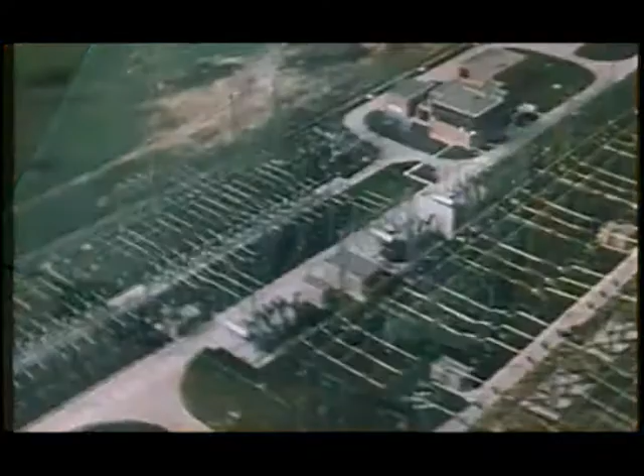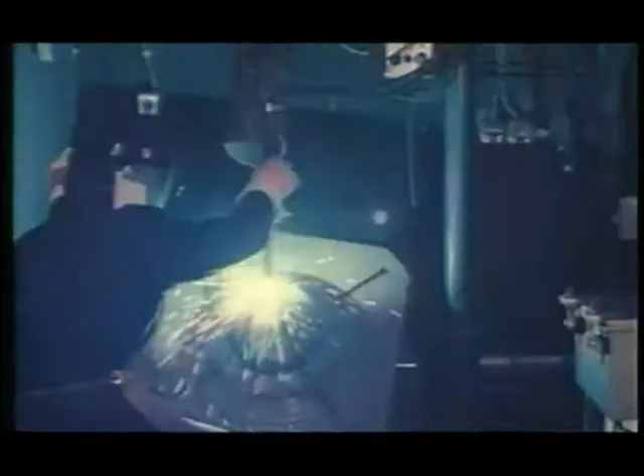Led by the pioneer spirit, Energoinvest grew quickly in all dimensions and qualities. Based on its own projects, factories were built one by one, used for production of reinforcement structures, power pylons, and tons of grey cast.

As early as 1959, Energoinvest crossed the borders of the country and entered the international market. The expansion continued through reliance on own factories for production of electrical equipment for low, medium and high voltage.

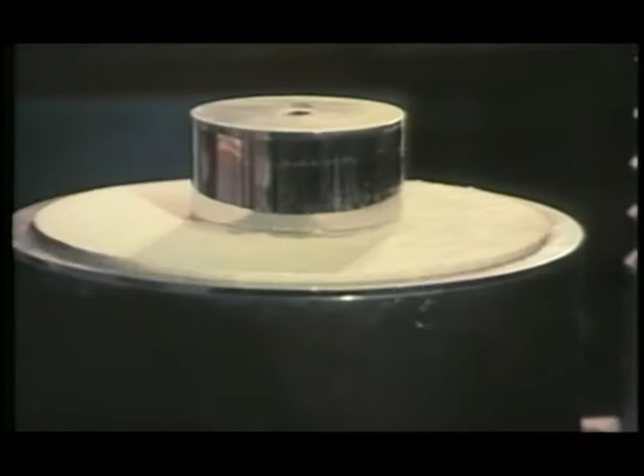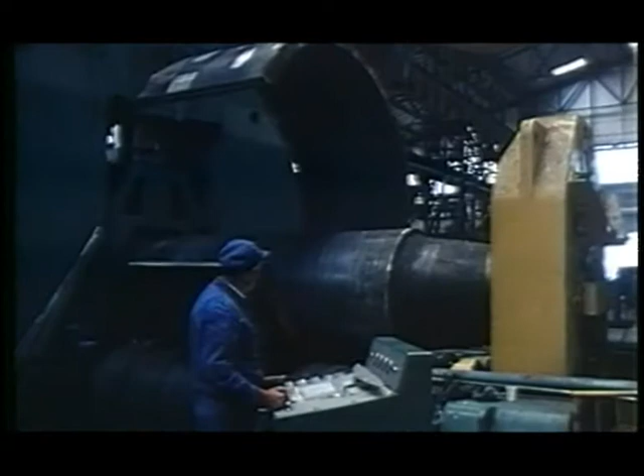In parallel, factories were built for production of processing equipment, heating equipment, heat converters, containers for non-standard pressures and temperatures of water and steam, and specialized reinforcements. At the same time, capacities were built for production of equipment for transfer of electric power.

It was in this specific domain, design, production and construction of the largest pylons with transformers, that Energoinvest earned a respectable international reputation.

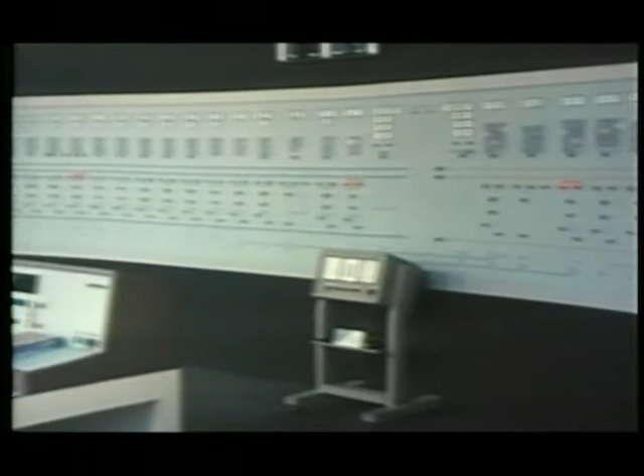Energoinvest reached a high international rating also in the sphere of design and production of systems for automated management of production processes in hydroelectric and thermal power plants, oil pipelines, facilities in air and sea traffic.

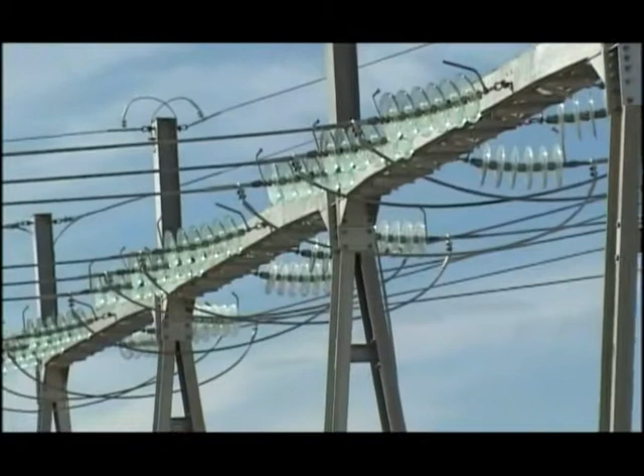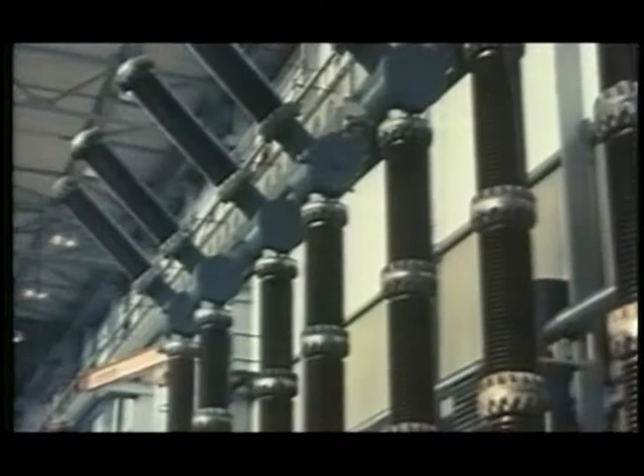Energoinvest designed and built more than 60,000 pylons of different voltage levels worldwide, and around 7,000 transformers, of which 500 fall into the category of the largest power facilities.

Energoinvest constructors built more than 50 hydroelectric power plants in the country and worldwide. For example, Jajce 1 and 2, Jablanica, Salakovac, Trebišnjica, Rama, Visegrad, Bočac.

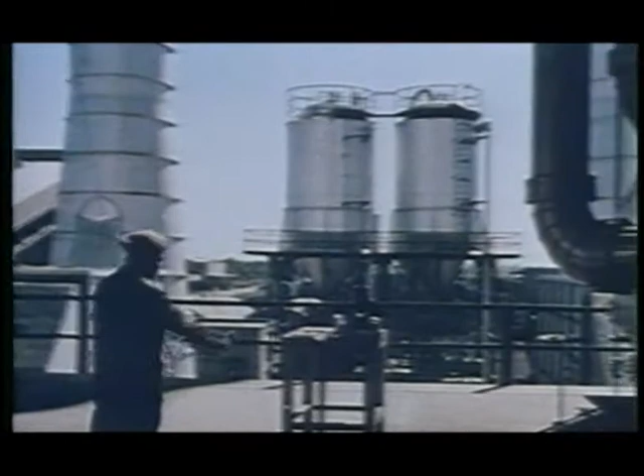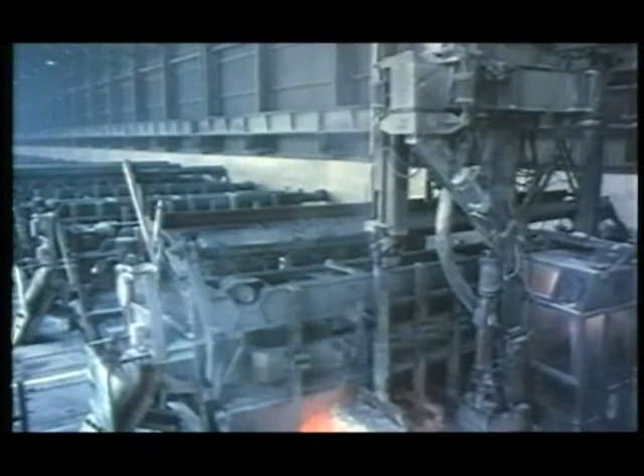Energoinvest also built production capacities of high industrial complexity, such as aluminium in Mostar, aluminum oxide factory Birac in Zvornik, aluminum processing factory in Šipovo, Vlasenica, Bihać and Široki Brijeg.

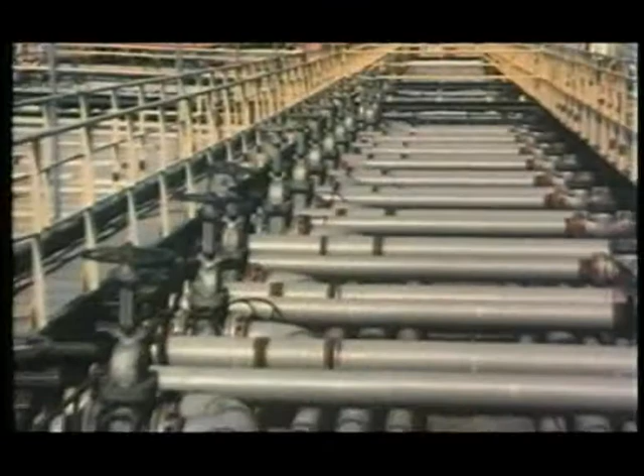Energoinvest put its signatures also on refineries in Bosanski Brod and Modrica, Hempro in Gradačac, methanol acetic complex in Kikinda, expanded refinery in Tobruk, facilities in the Skikda refinery in Algeria, numerous liquid fuel terminals, spherical tanks in the chemical industry, and other products in the highest class of Lloyd.

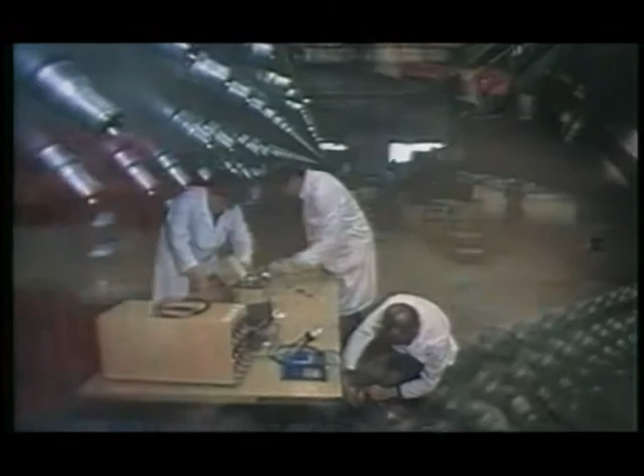By designing and producing steam separators for nuclear power plants in the late 70s of the last century, Energoinvest became a member of the world's elite industrial class.

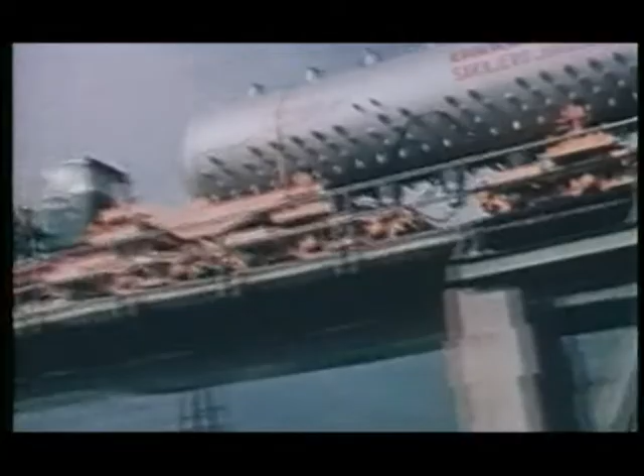Countries in other continents would lag behind achievements of the modern world. Over the past 55 years, Energoinvest was active in global development fronts.

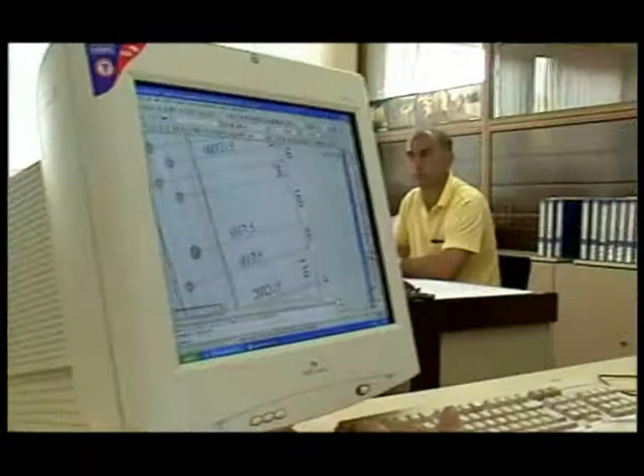Highly qualified experts with multidisciplinary knowledge were declared by Energoinvest from day one as the main resource, the supporting column, and at the same time as one of the goals of its development.

Such orientation of Energoinvest was the industrial renaissance of the whole Bosnia-Herzegovina and the flywheel of development of university education.

Previously won and new competency recognitions were expressed through Lloyd's Register, seals of the American Petroleum Institute, ASME Code, Stamp U and U2, Charter for the Best Achievement in Construction, membership in CIGRE, recognition of the World Economic Forum as one of the most successful companies in Central and Eastern Europe, ISO certificates of the Lloyd's Register, ISO 9001-2000, ISO 14001-2004, and OHSAS 18001-1999.

Among others, Dutch and American companies bought licenses from Energoinvest. Energoinvest gave society the most respected university professors, ambassadors, mayors, ministers, prime ministers.

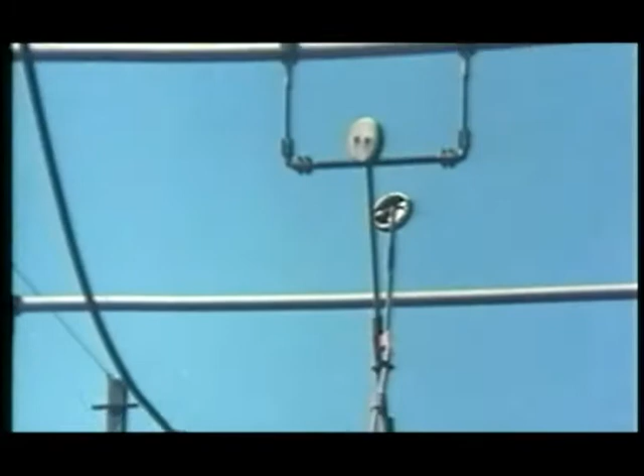Today, Energoinvest is a company with strongly expressed functions of engineering systems, offering synergies using the turnkey formula and servicing highly demanding local and international partners in construction, reconstruction, modernization and revitalization of complex buildings and facilities in its field of activity.

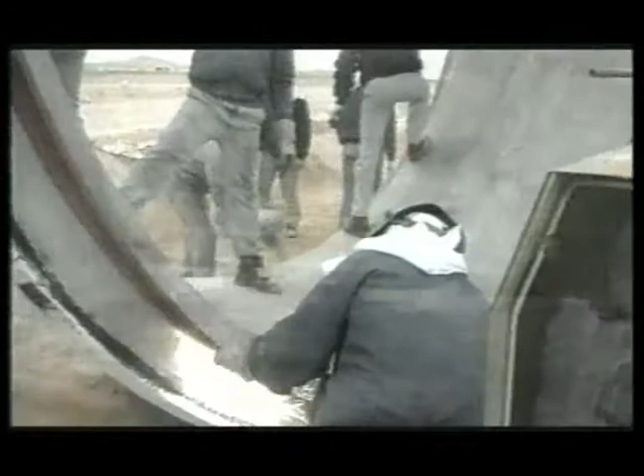Energoinvest is currently working on implementation of the Great Man-Made River project in Libya, the most grandiose engineering undertaking today, thanks to which, from the heart of the Sahara, free-flowing potable water will be brought to traditionally thirsty areas of Libya, including the cities on the Mediterranean coast.

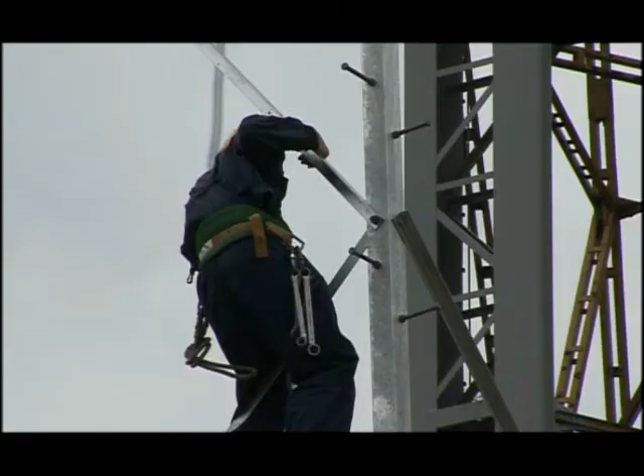In the fields of increasingly competitive, innovating and profitable business in a globalized world.

Energoinvest, 58 years of tradition and confidence.

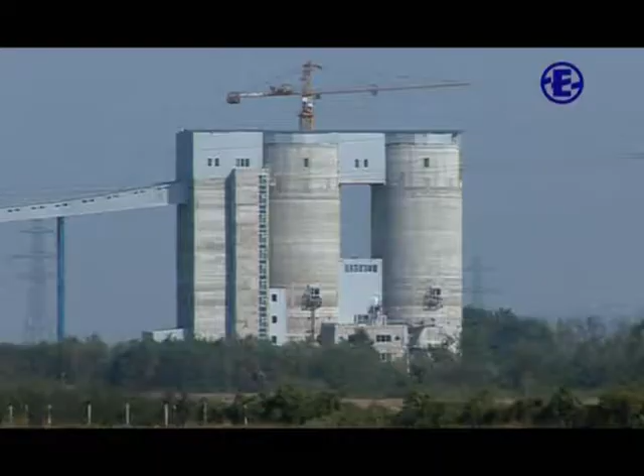Energoinvest is a leading company in Bosnia and Herzegovina in the domain of designing and implementation of complex projects in both national and foreign markets.

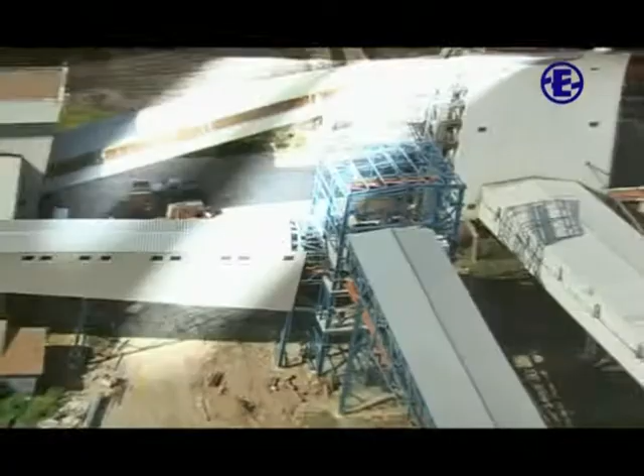With its wide scope of activities, Energoinvest is known worldwide as a multidisciplinary engineering company which employs 900 employees. Energoinvest's capability for successful implementation of projects on a turnkey principle provides impressive international reputation.

In March 2007, Energoinvest concluded a contract with Elektroprivreda of Serbia for realization of the project, an ash disposal system of thermal power plant Nikola Tesla B, which represents the first ecological project of this kind in Southeast Europe.

The project, at its first phase valued at 28 million euros, was financed by the European Union, the European Agency for Reconstruction.

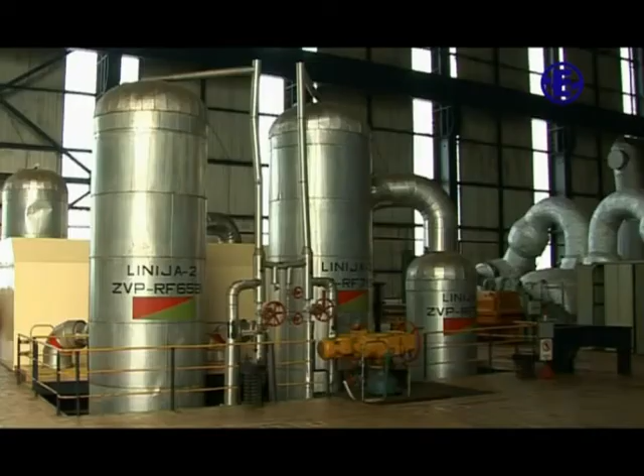Thermal power plant Nikola Tesla B is a power plant with two units, 620 megawatts each, situated in Obrenovac in the vicinity of Belgrade. This thermal power plant represents the strongest support to the electric power system of Serbia, producing over 10 billion kilowatt-hours of electric power annually.

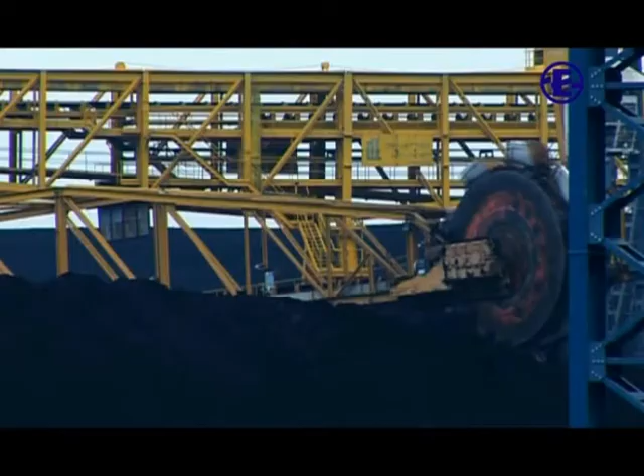The thermal power plant is fueled by lignite from the neighboring Kolubara mine, from which coal is transported by railroad. Daily coal consumption varies from 70,000 to 90,000 tons per unit.

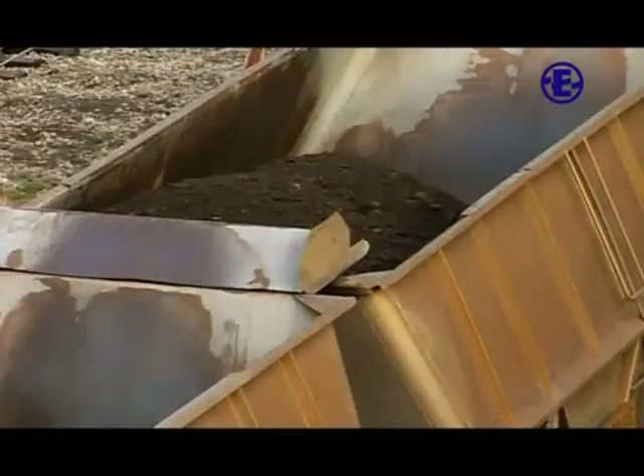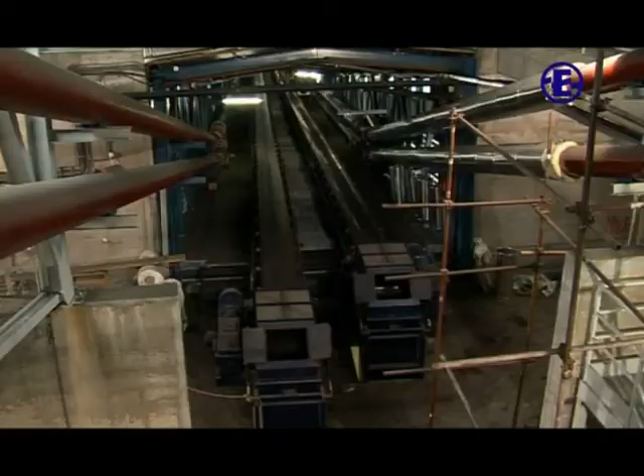Thermal power plants represent the basis for economic and business development of a society, but unfortunately are also major ecological polluters. Fly ash and bottom ash are accompanying byproducts that remain after coal combustion. The quantity of fly ash produced by one unit of this plant is up to 240 tons per hour, and up to 16 tons an hour of bottom ash.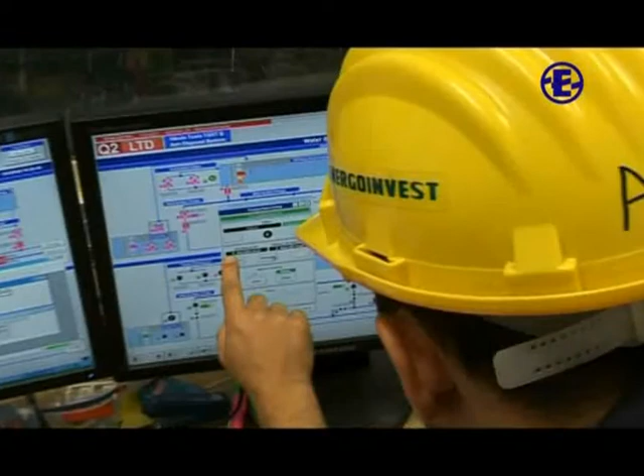Our team of experts ended up with a big challenge in this project: to solve the way of transportation and disposal of fly ash and bottom ash with minimal water consumption and minimal level of pollution, satisfying all European standards of preservation and protection of nature.

The previously used system of fly ash and bottom ash disposal involved mixing 17 liters of water with 1 kilo of fly ash and bottom ash, the so-called low-density slurry. Huge quantities of water from the Sava River were used for this mixing and transportation, and after draining, these huge quantities of water were returned to the Sava River, thus polluting underground water along its path.

After water draining, the fly ash that remains in mealy condition can be dispersed even by the weakest wind over nearby settlements, and even to Belgrade.

We replaced the old system of low-density slurry disposal with a new hydraulic transportation system of high-density slurry. At present, the mixing ratio between fly ash and water is 1:1.

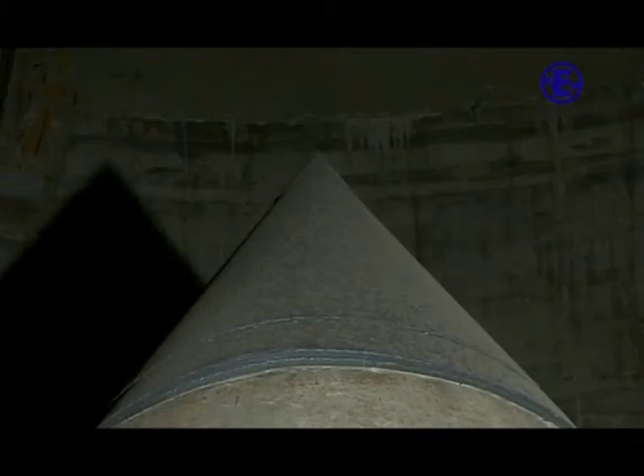In order to provide conditions for creation and transport of homogeneous slurry at a ratio of 1:1, we designed and built 2 new fly ash silos, 1 bottom ash silo, and 3 mixing units.

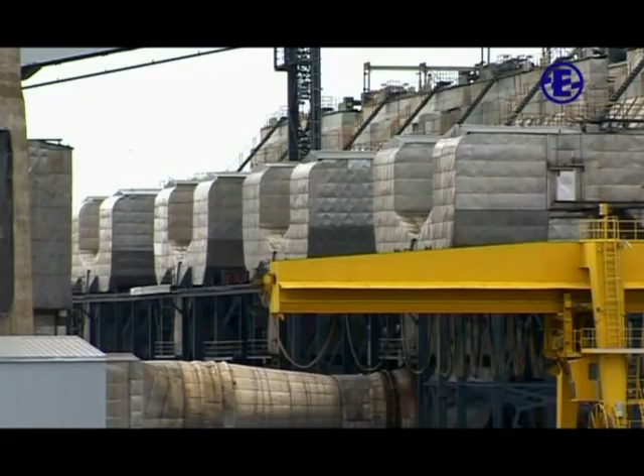After coal combustion, the fly ash is taken from 3 points: the fly ash collector of the flue gas duct, the fly ash collector of air heaters, and the fly ash collector of electrostatic precipitators.

Collected fly ash is transported by pneumatic transportation to the fly ash silos.

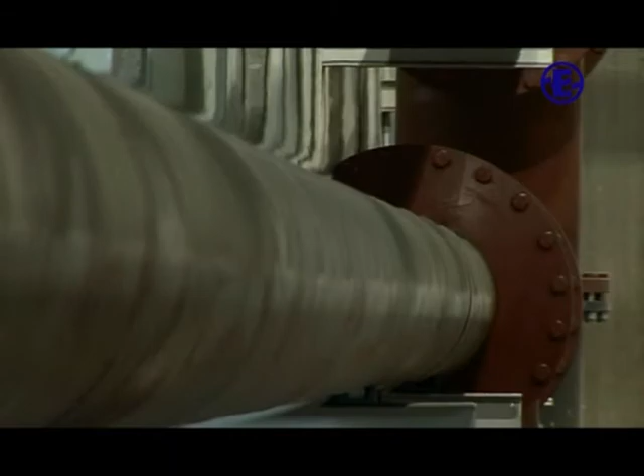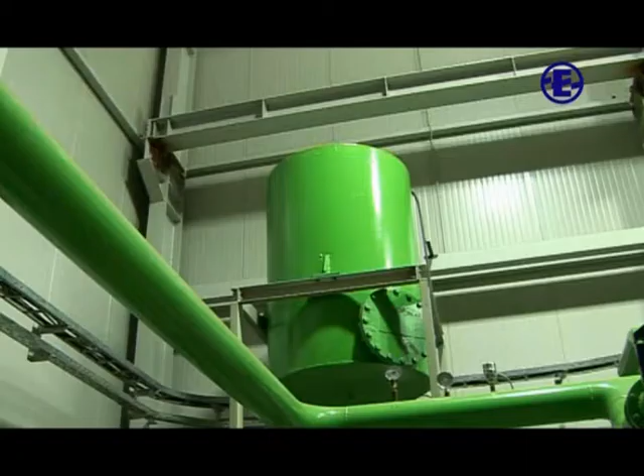In order to secure the operation of pneumatic transportation and the control air system, we designed and built a compressor station equipped with modern units for production of compressed air. Compressed air, as a key element of pneumatic fly ash transportation, is directed through a purposefully built system of compressed air pipelines.

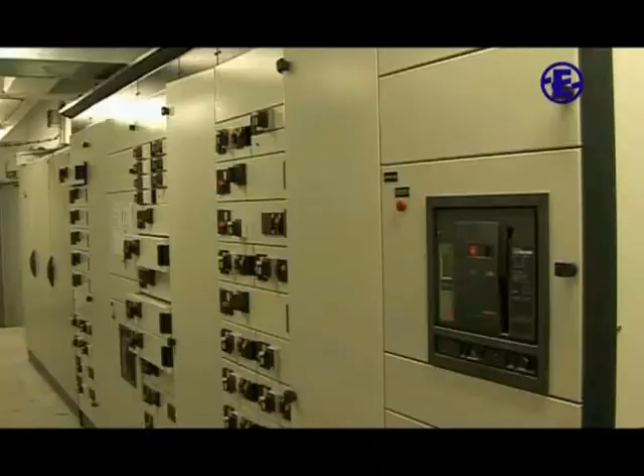The continuous power supply of the new ash disposal system is provided by a substation of 6.6 by 0.4 kV, which is designed and built for that purpose.

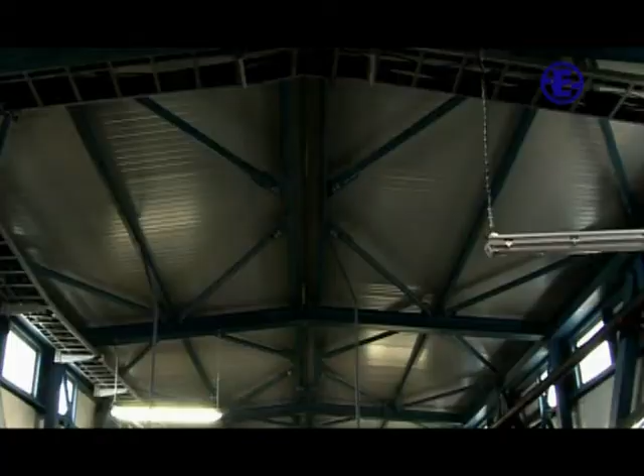The pipeline system for pneumatic fly ash transportation from electrostatic precipitators to the silos is placed on a new leaning bridge with a total length of 550 meters.

After coal combustion, the bottom ash from boilers is transported to the bottom ash silo by a new system of belt conveyors.

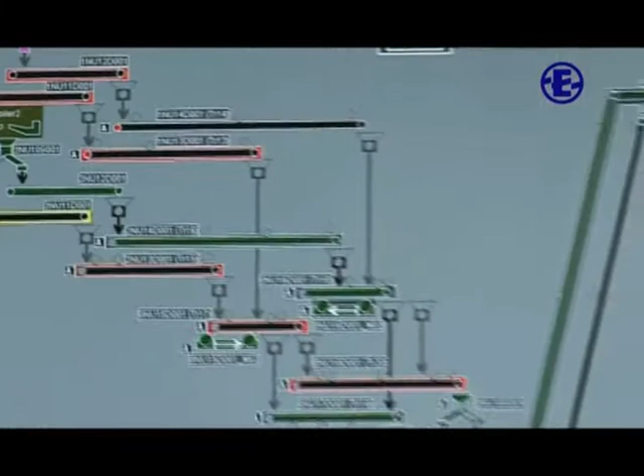The grandiose leaning bridge connects the thermal power plant and the silos complex, representing the basic pairing element of the bottom ash belt conveyor system and the pneumatic fly ash transportation system.

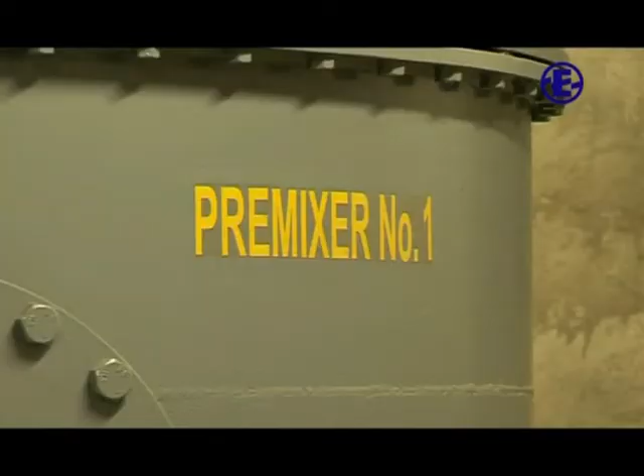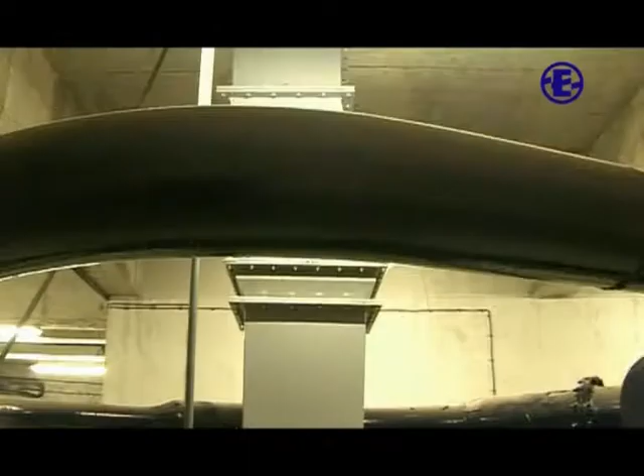Within the fly ash silos complex, we designed and installed 3 mixing units, which provide a homogeneous mixture of fly ash, bottom ash and water. 2 mixing units are placed below fly ash silos with a capacity of 4,200 cubic meters each, while the third unit is placed in the area between the 2 silos.

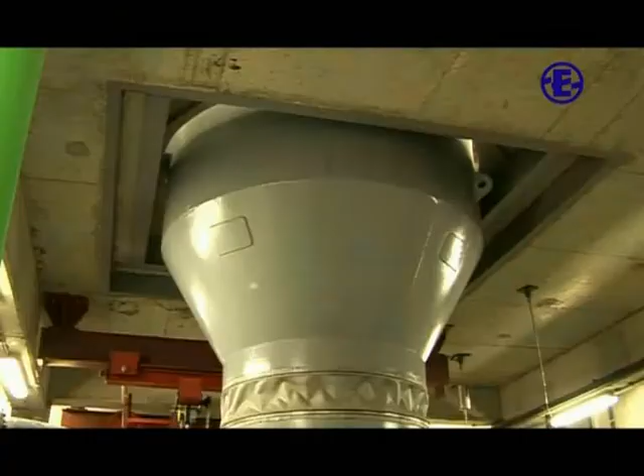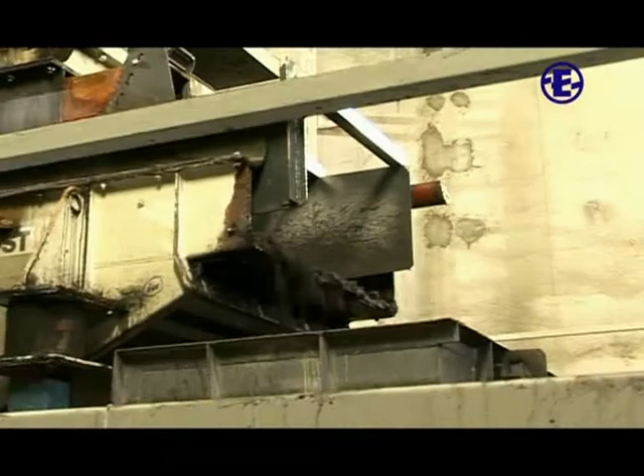We used a technology of fly ash removal from the silo such that any of the mixing units can be filled from both silos. The advantage of this method is that if the fly ash silo currently being emptied runs out of fly ash, emptying of the second silo continues toward the same mixing unit without interruption of the process. The bottom ash silo provides continuous bottom ash supply for all mixing units.

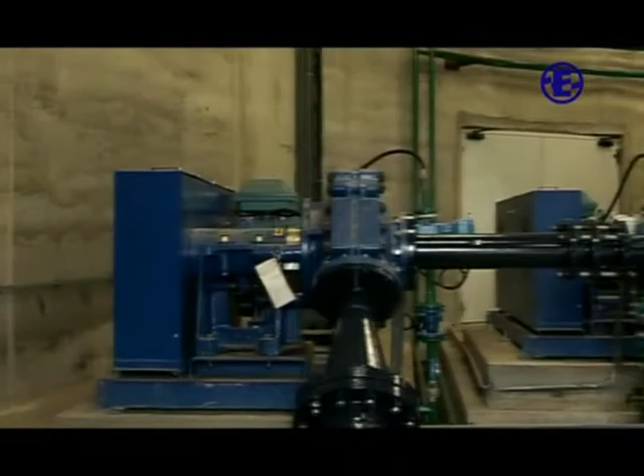In the silos complex, we designed and installed 4 slurry pumps connected in a row for each mixing unit, providing sufficient power for transport of slurry through the long-distance slurry pipeline to the disposal site.

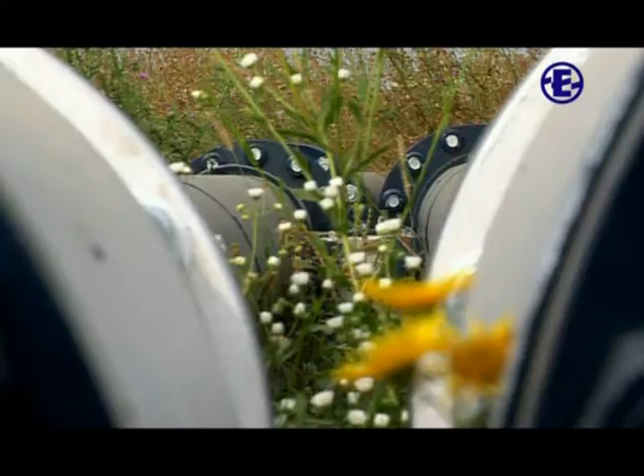The long-distance slurry pipeline consists of 3 pipes with a total length of 12.9 kilometers, while discharge of slurry on the disposal site is provided through a 7.7 kilometer long distributive pipeline.

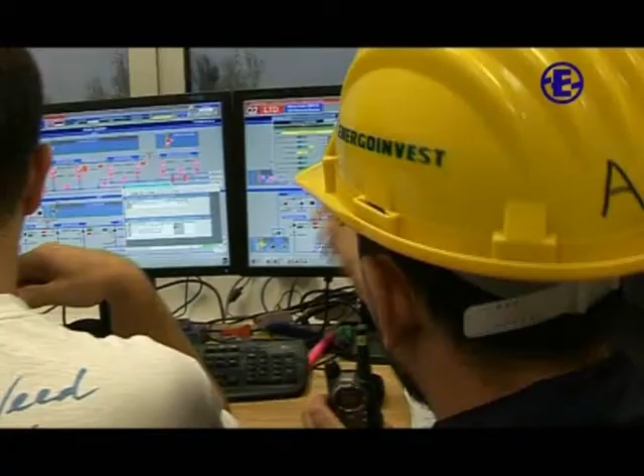Operation and synchronization control of the whole ash disposal system is performed by digital automatic PLC technology. PLC, which stands for Programmable Logic Controller, provides control of all elements of the system from one place.

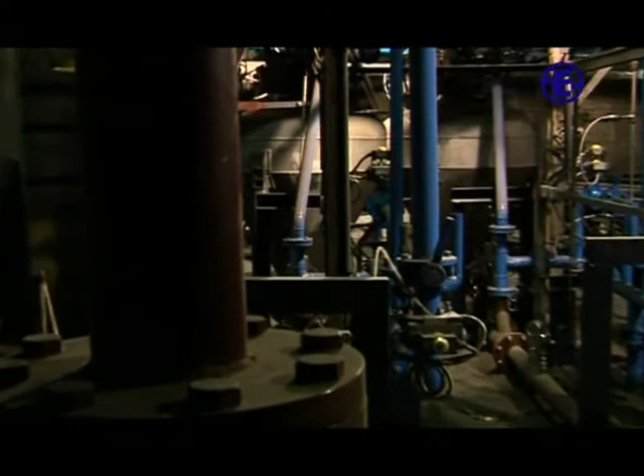The new transportation and ash disposal technology reduced the possible level of influence of ash disposal on air and underground water pollution to a minimum, since the disposed content is compact and wind dispersion of fly ash particles is therefore prevented.

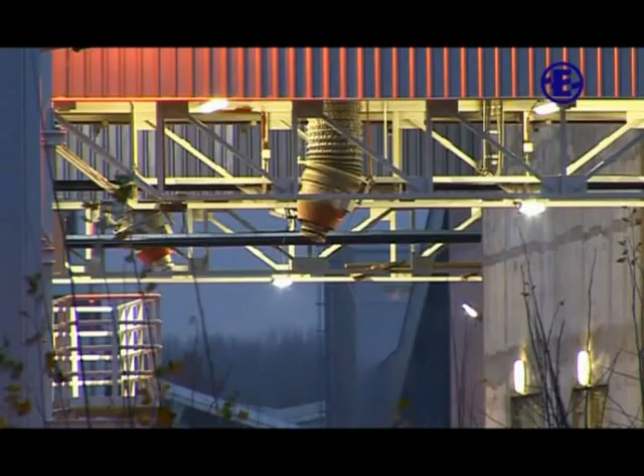This ecological ash disposal system provides for the use of fly ash and bottom ash in the civil engineering industry, so that part of the waste becomes useful.

Through implementation of this project, which is the largest ecological project in Southeast Europe, we responded once more successfully to the energy development challenge of the region, with the primary goal of preservation and protection of the human environment.